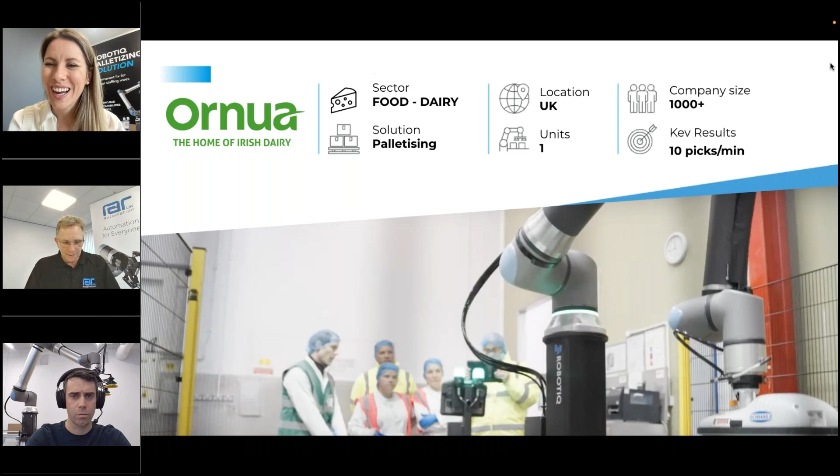Correct, yes. So without any further wait, let's dive in and we'll present you the project in action. I'm just going to do a little switch to make sure you have a great video presented. So guys, over to you.

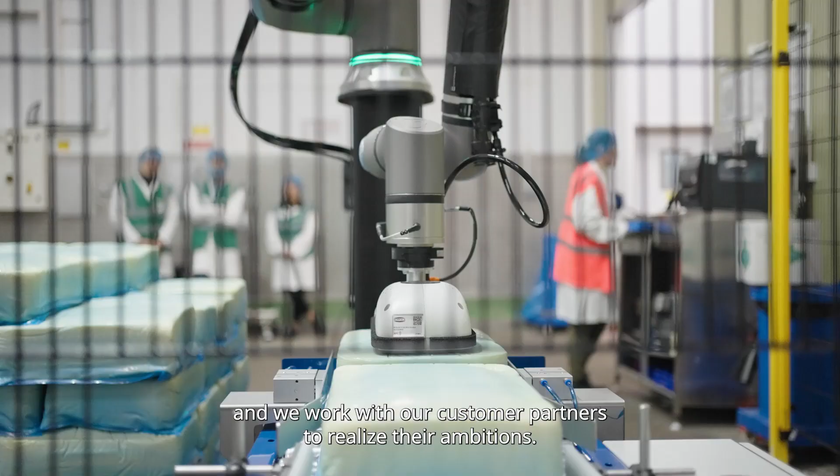Ornua is a dairy cooperative which specialises in the marketing and sales of dairy products. Our culture is founded on innovation and collaboration, and we work with our customer partners to realise their ambitions. We decided to look at automation because we recognise the potential of new technologies in increasing efficiency and also helping us develop talent and deploy human resources in the most effective areas on site.

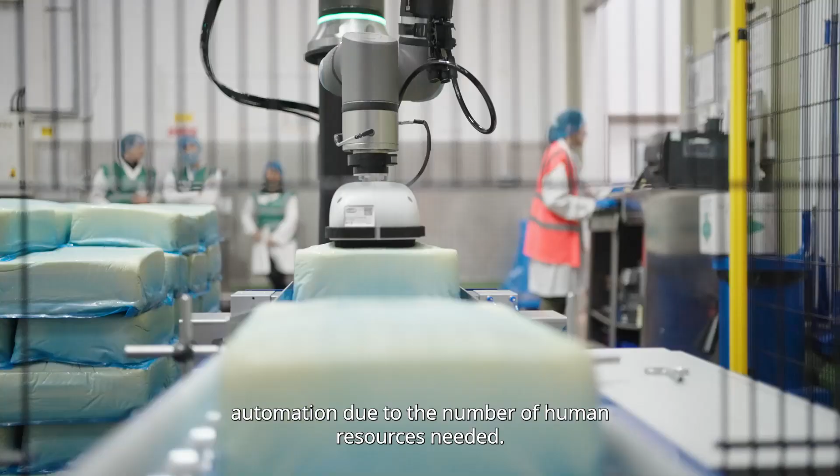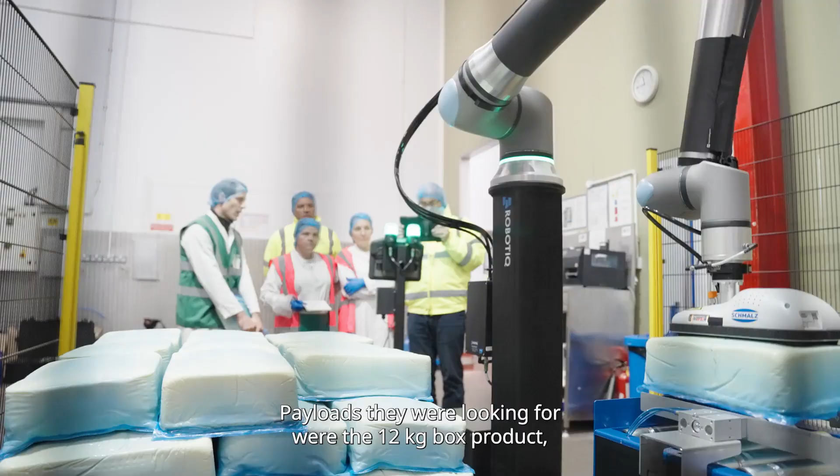We looked at palletizing as the first area to explore automation due to the number of human resources needed. If we can automate that task, then those resources can be used elsewhere. There's a health and safety aspect as well. Ornua were looking for end-of-line palletizing to free up some labour. The payloads they were looking for were the 12-kilogram box product, a 6-kilogram box product, and then the cheese, which is a 10-kilogram product.

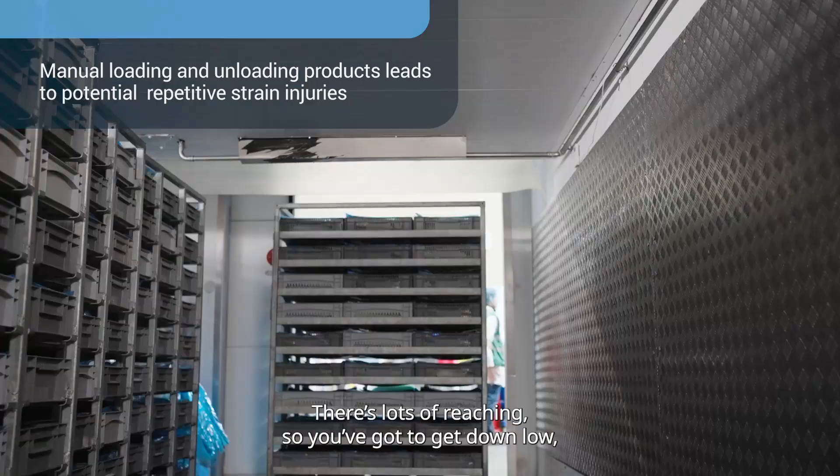Manually loading and unloading product leads to potential repetitive strain injuries. There's lots of reaching, so you've got to get down low, you've got to get up high to palletize manually. It's an application where it's quite tough to hire people because it's a repetitive task, low skill. The turnover for the employee is quite high, and it can be a real challenge.

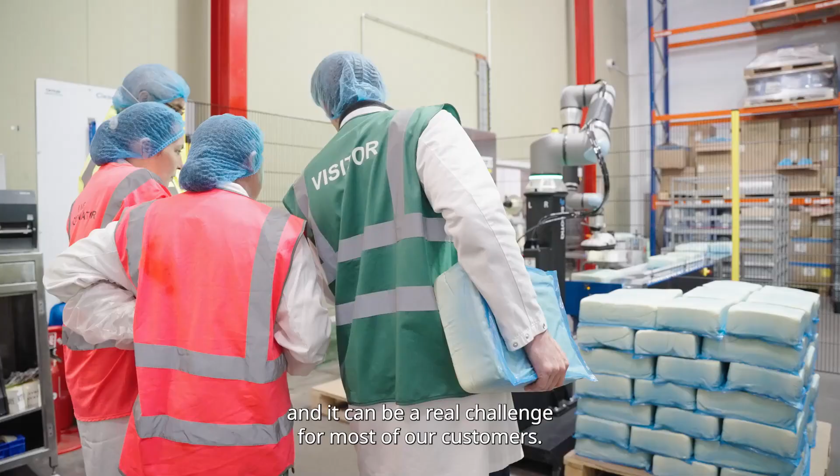For most of our customers, they will automate the palletizing, and the people that they free up will be assigned to a higher value task.

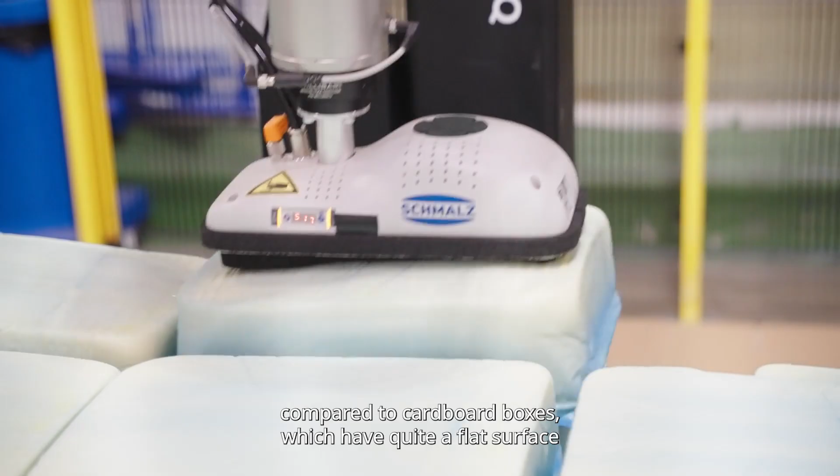The challenges with palletizing the dairy products in the film are the film could become quite slippery, and compared to doing cardboard boxes, which is quite a flat surface and uniformed, the dairy products can come in different shapes and forms. When we were looking to find a solution, we searched for a few suppliers, but they didn't offer the collaborative robot. It was more of a robotic palletizing cell, which means the human interaction would have been completely guarded off.

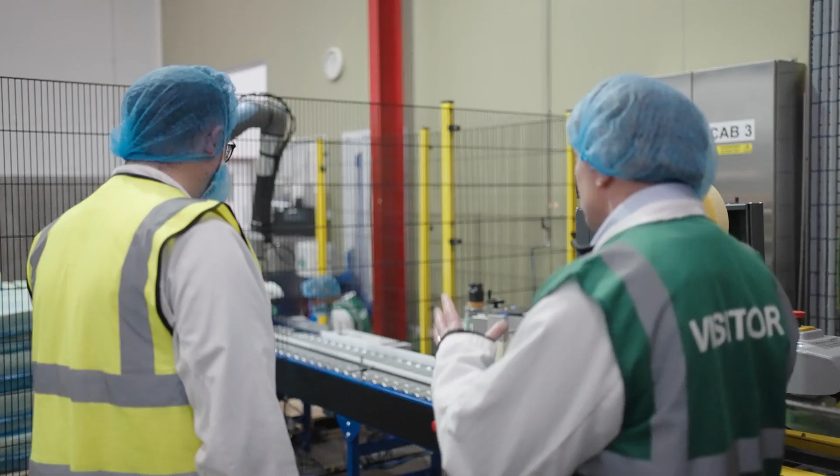It's important to have the option of people to be able to work around the Cobot due to the nature of the product. We pull out on pallets quite regularly.

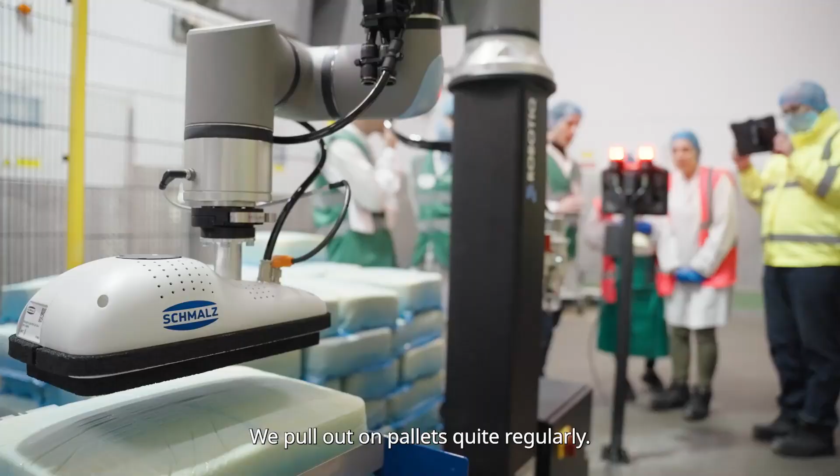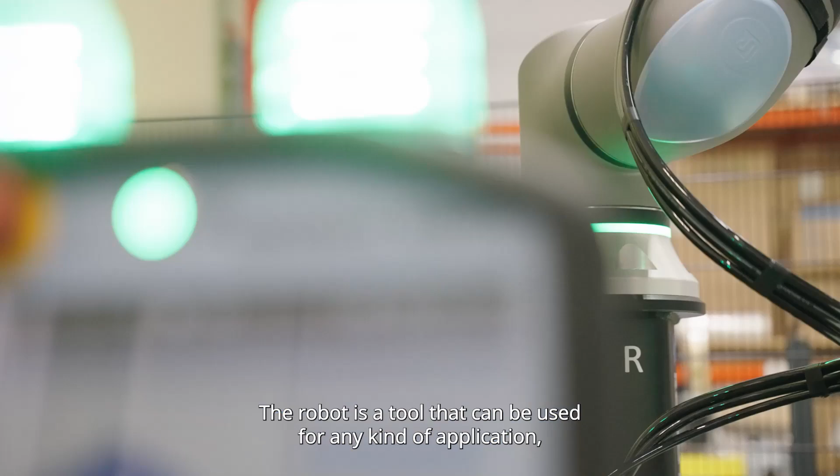We got in contact with RAI UK and Robotiq, which helped us find a solution. What we do is basically we build a solution all based on the universal robot. The robot is a tool that can be used for any kind of application, but we develop a software level that's dedicated for palletizing.

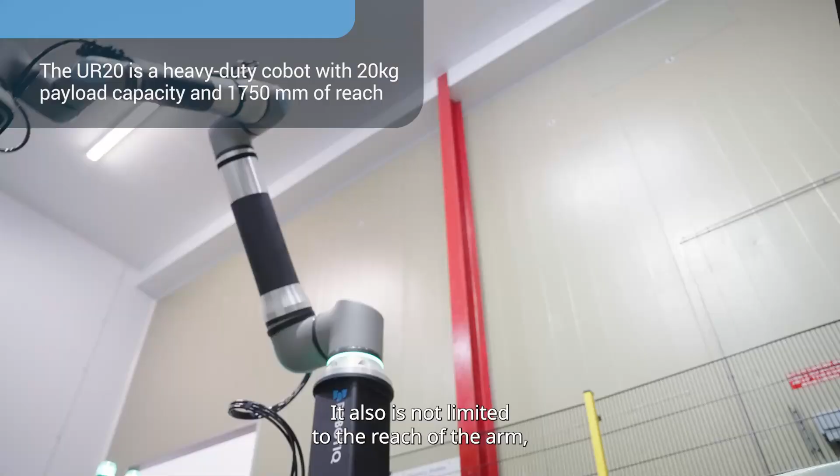When I found out about the UR20, we were quite excited due to its capability of lifting up to 20 kg. It also is not limited to the reach of the arm, which means it can stack higher and further away.

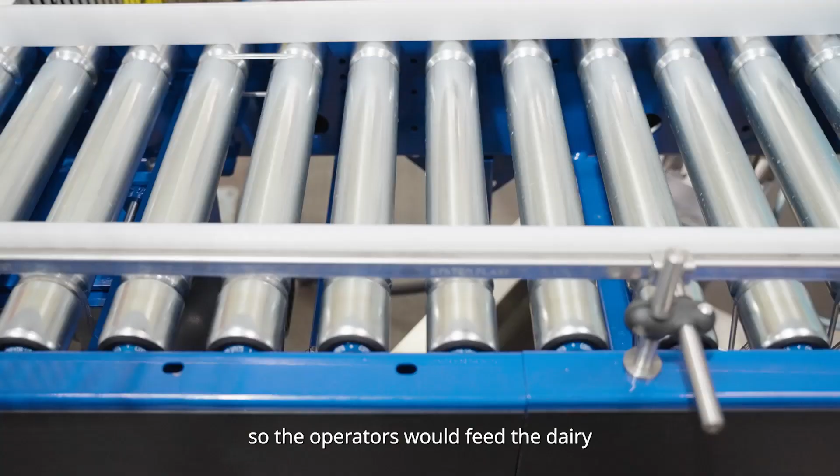The task that the Cobot is performing is a simple pick and place. So the operators would feed the dairy products or the boxed dairy products into the conveyor. The Cobot will then pick up and put onto a pallet in a correct format.

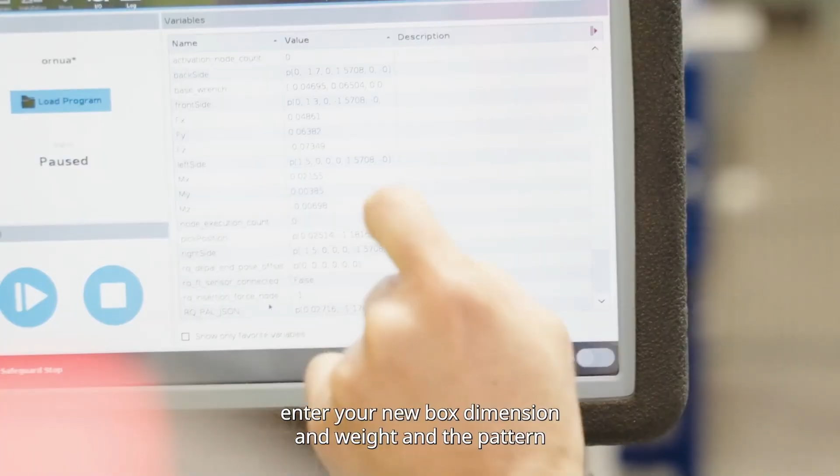Having a solution like we have, it means a visual setup, so you don't need to program lines of codes. You will just open the palletizing interface, enter your new box dimension and weight and the pattern, and then you just press start and the robot will do everything automatically.

The process of working with Universal Robots, RAI UK and Robotiq has been quite smooth. We've had regular updates throughout the process. They've done a lot of trialing and fed back at every point.

The feedback of customers using Universal Robots is that they're user-friendly. We have many customers who are repeat customers. They buy multiples. Very satisfying to see the system now deployed and up and running.

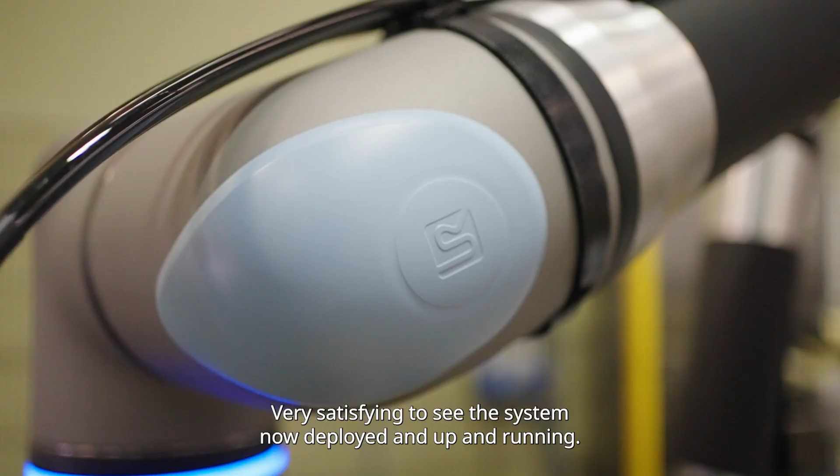I'm hoping after the install of this Cobot that the business will be a lot more open to adding more automation on the ingredients and food sites. Repetitive and dull tasks just need to be automated. That need won't go away, it will keep on increasing. So for the future of automation is bright.

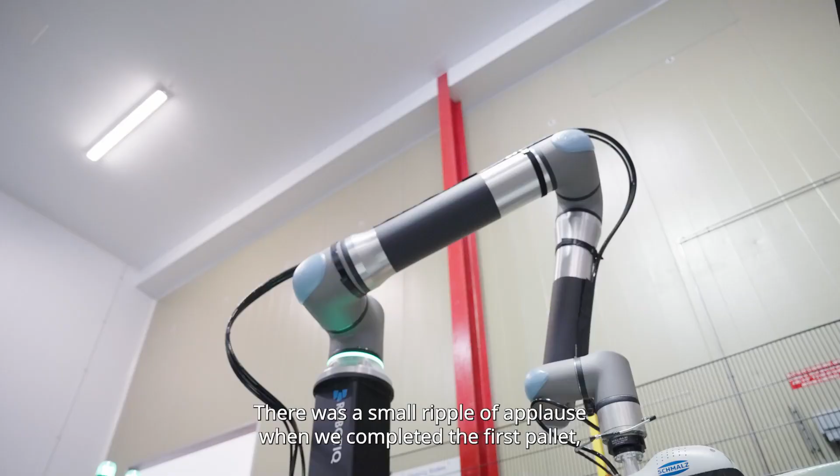It's very exciting to see the UR20 running. The response here has been excellent. There was a small ripple of applause when we completed the first pallet, so which was nice.

Thanks for this amazing video. Oh, I won't start it again. I should make sure that I'm unmuted. Okay, I'm unmuted. Everybody's unmuted. Okay, great. Great. Thanks for this great video. Looking good, guys, with this little blue caps both on the floor and in the video.

You must be really proud of that project too, also with a great collaboration with Ornua. Yes, it's been good to work with them, and yeah, and also our partners. We work with a conveyor company, Denny Brothers, who helped us with the in-feed side.

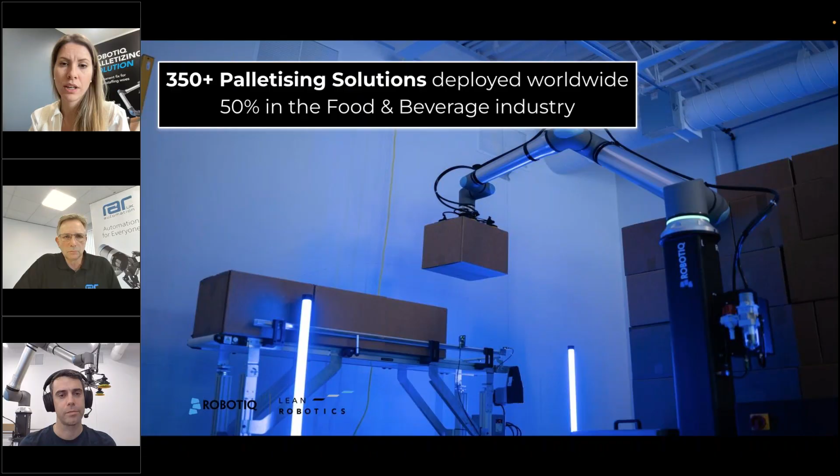Great. So yeah, we were seeing here already more than 350 plus solutions deployed worldwide. Pretty impressive numbers, considering that the solution hasn't been out in the market for so long.

Yes, the majority of ours have been in the food industry mainly, and that's not just human food, it's pet food as well. We also have an application in consumer goods, so one of the companies listed there. So they're the main ones - we followed your lead really. We've looked at the type of companies you're working with and found exactly the same. And also the range - it can be a small company, maybe 50 employees or so, right through to the bigger companies, the multinationals.

Great. I think you also know really well the cosmetics industry, but from cosmetics to the little bakery - I think the great project you deployed recently at a small bakery in the UK, right? Yes, the smallest one is a bakery company, and then there are others who are multinationals.

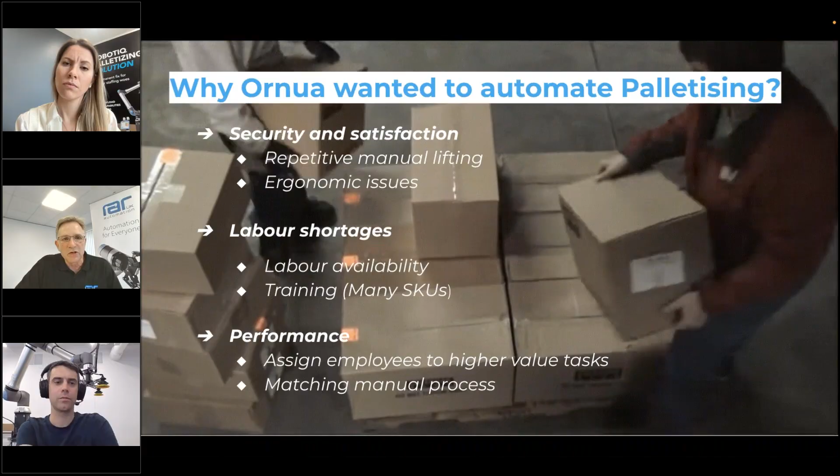Particularly with Ornua, there were challenges in their application because gripping was the problem. I think Jack mentions it in the video - the shape is not always consistent, and there's condensation, so it's a bit of a wet, slippery application. So gripping was the big problem.

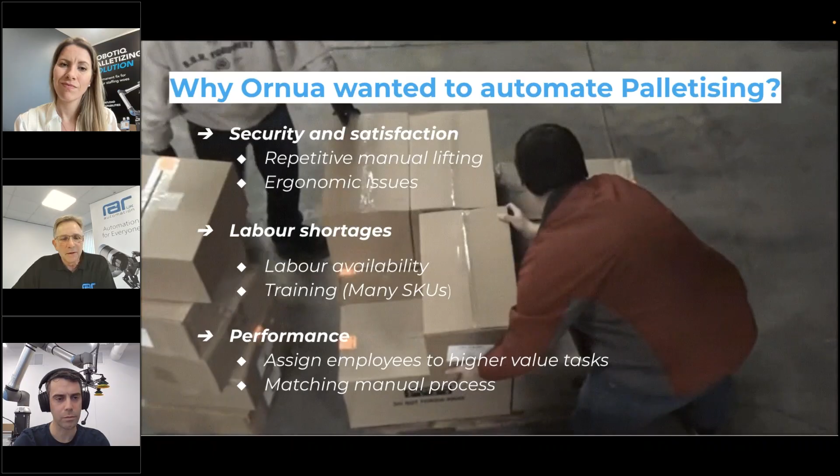Also, we're key to getting the product with palletizing - it's key to get the product in the right place for picking. So that's where the conveying comes in. It's important.

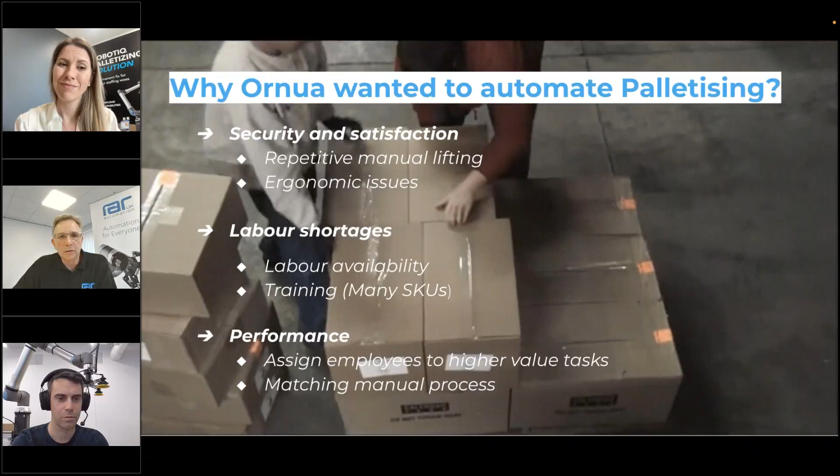Obviously they were keen on ergonomics to avoid manual lifting. And I think Jack also mentioned they were very keen to be able to assign their employees to other roles with higher value tasks, and probably a nicer job really. That's the key.

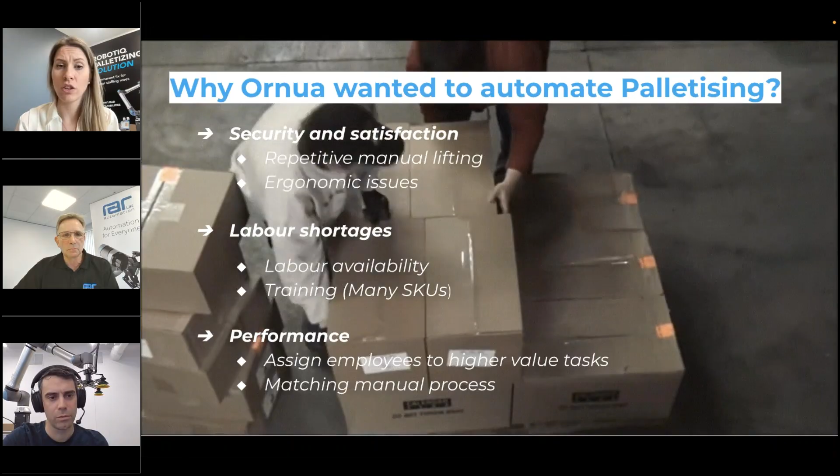So three main elements - we have security, and satisfaction of the employee, although they have a very good retention of employees at Ornua. So they see that people love to work there, but still they would like to offer them a better job and assign them to these higher value tasks, as you said.

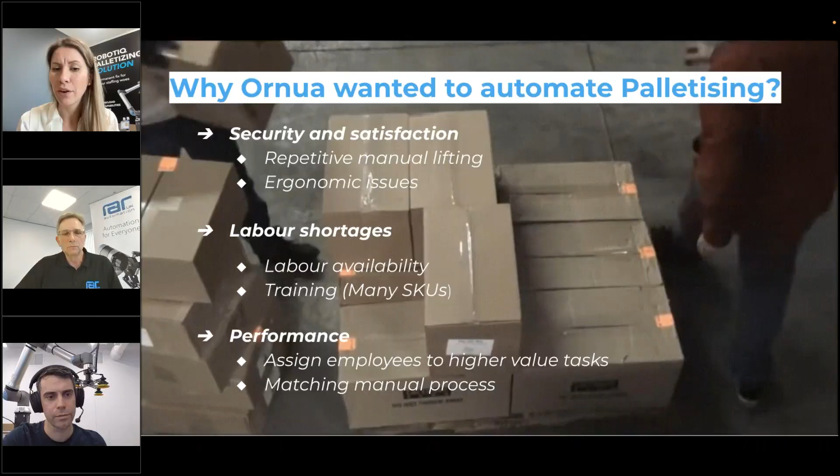And labor shortages - I don't think they're saved from or an exception to the rule of many other manufacturers. That's correct, we do see labour shortages in the UK, but I think Etienne mentioned earlier about the flexibility - the ability to add in extra SKUs relatively quickly is an important factor.

So I think it's interesting what Jack was mentioning here. He said we decided to look at automation because we recognize the potential of new technologies in increasing efficiency, and also helping us develop talent and deploy human resources in the most effective areas on site. So simply confirming what their need was to go through automation.

And we see a lot of people say, okay, we have so many potential elements in our production floor where we could automate. Why do people tend to choose right away the palletizing, you would say? Maybe Etienne, what would you say about that?

There's two aspects, I think. One, it's a job that's a bit tough, so we tackled it. The population is aging, and it can be physically challenging. For example, lifting 12 kg boxes all day long is probably not the job you want if you're 60 years old. Maybe at 25 you can do it, but at some point it's just tough. So that's good reason to automate it.

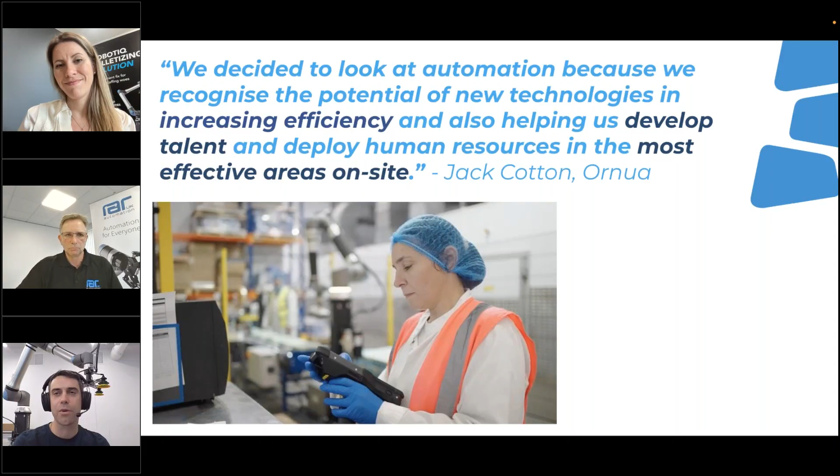It's not standard. If you go downstream to the pallet, there is a standard. The pallet is standard - there's UK size, European size, Australian size, or whatever, but at least there are some standards. A pallet is already defined by the industry, so we always know what the pallet is.

So it's easier to automate for a company like us, Robotiq, building a solution like that is easier than other applications. For the end user, there's always some little things that change that we need to adapt to, but it's always downstream, always in similar environments, always on a pallet - either cardboard or plastic, but it's a semi-rigid thing that you place on a pallet. That's probably the easiest application to automate.

If you go upstream, you need a bit more skill to do the packaging, the wrapping - those applications are tougher to automate. It's really like replicating the manual process. So for people on the line, if you don't know where to start, maybe end-of-line palletizing can be a first step, because a collaborative robot can allow you not to change your equipment but to work with what you currently have.

So we'll bring you through the journey of the lean robotics methodology, as we said. We really focus here on the people, the productivity, and the adaptability, and that's the beauty of this type of solution. We usually go through three phases: design, integrate, and operate.

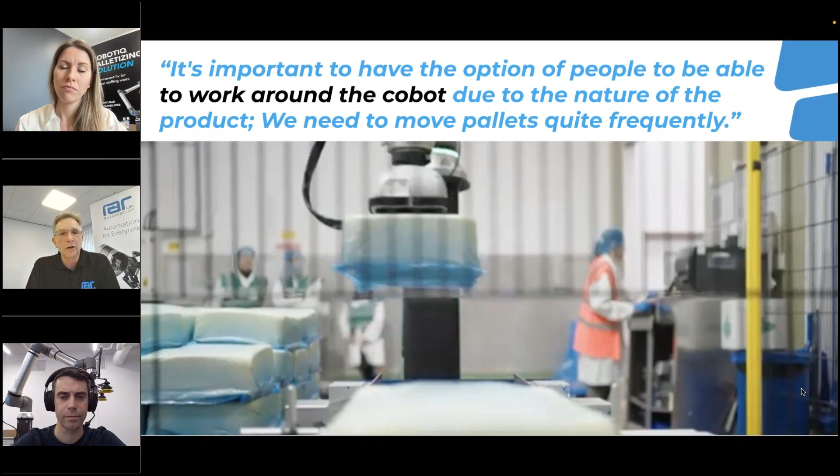Sometimes we hear about scanners. Were there any security scanners in this case, or only the light curtains? On this one, we used light curtain, but other applications we have a scanner. They do the same function. There are reasons for choosing one or the other, sometimes customer led, sometimes we advise as well.

Thanks a lot for that, Andrew. Very interesting photo to see, as we said, the people working around the Cobot. So as we design, we won't go over all that slide, but just to give you an idea of really our way to proceed.

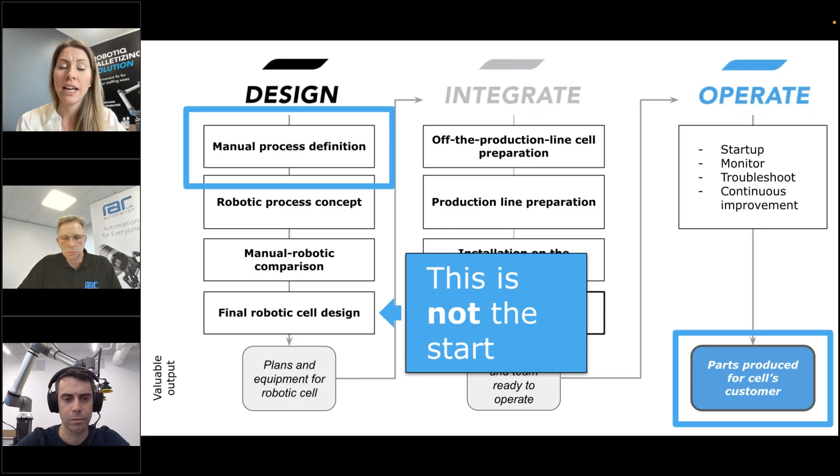Sometimes people really focus on the final cell design. So Etienne, maybe give us some thoughts about how do we go from the manual process in this design phase to the automated process? The typical thing we start with, before any orders come in, is what I call the concept phase. At the concept stage, we'll be looking at what we need to automate, the manual process, and the KPI of the customer. Usually they will give us a cycle time, so we need to achieve 8 boxes per minute, something like this.

Sometimes it's also about the accuracy that they want to reach on the pallet, how tight they want it to be. So these kind of things we need to look at, and then we come up with the concept phase.

The concept phase looks at the high level idea, so are we going for a collaborative application or not? The solution we have is sometimes confusing for our customers, so it's important to mention it: it's both an industrial robot and a collaborative robot. Same hardware, we can apply parameters to get it into collaborative mode, so it will move a bit slower and be gentler. We can reach maybe 5-6 picks a minute with that.

But the same hardware, without any extra cost, we can just put it to maximum speed and acceleration, and then we'd reach 12-13 picks per minute, behaving like an industrial robot. So that's the kind of thing we want to tackle at the concept phase, because it will change what we need to deliver to the customer.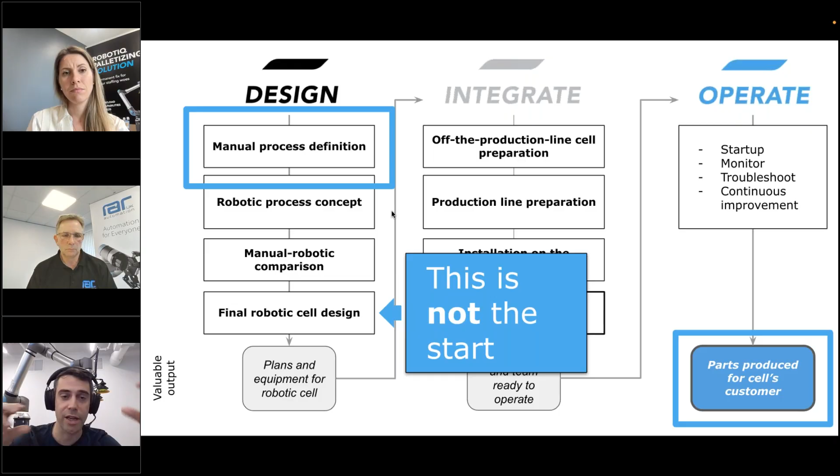The nice thing with our standard solution is that the design phase is really short. If you went to an integrator starting from a white page, basically, the design could last a couple of months. In our case, there's a solution we can deploy in pretty much all scenarios we've seen, so the design phase is usually really fast because for us it's just modules. You want this and that, we put it together and the solution is there. We're not building from scratch.

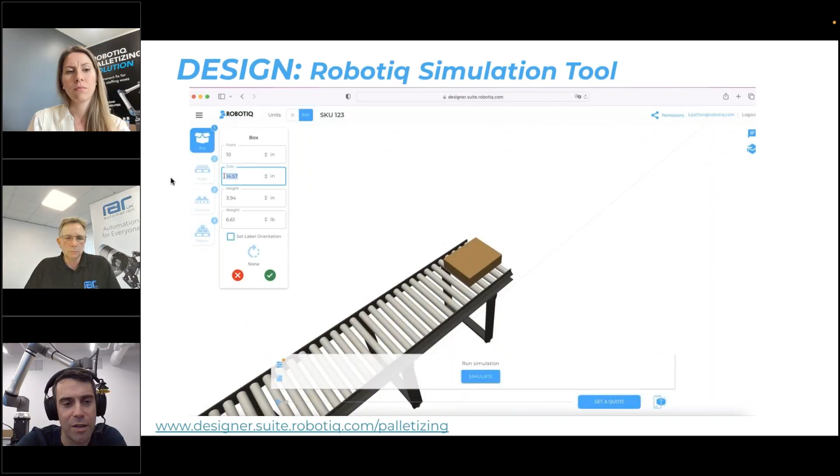Now just showing the simulation tool, which is also a very nice tool we use in the design phase. It's accessible, public, on our website, where you can configure your application. You input the box you would have, the conveyor you would have, the pattern you desire, and then you get simulation results in a couple of minutes.

It's also nice to try this because it's actually very similar to the interface you have on the teach pendant, the HMI. So what we see right now with the pattern is exactly what you would get on the robot, and it's how you would teach the robot your palletizing pattern. With that, you can see if it's suitable for you, both in terms of footprint and performance. That's everything we do at the design phase—it's swift and easy, so it's definitely an important part of a project.

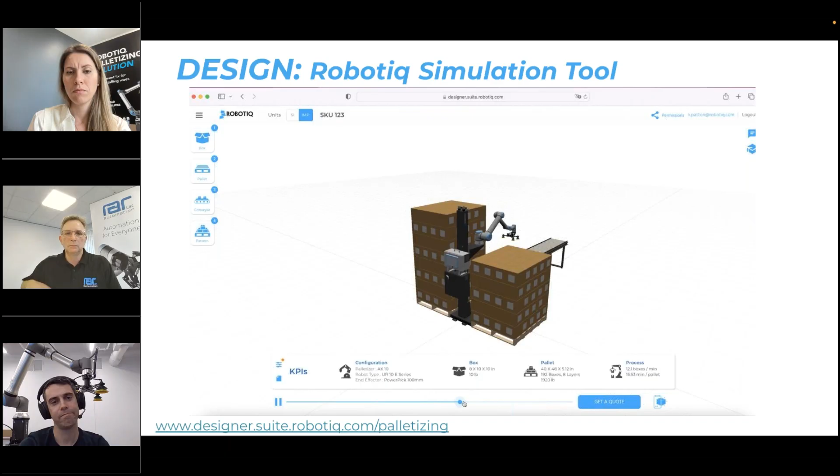Good, thanks a lot, Etienne. I appreciate it. You mentioned it's pretty fast to deploy the solution, so we talk a lot about standardizing with easy scalability. What do we mean here, especially? Or maybe Andrew would add something.

I could start, but first of all, I think with Ornua it's a good example that it's the first Cobot project throughout the whole corporation. So it's first at that factory, but also through all of their factories. They are learning with the project that they can now standardize on it, and they can deploy to other factories, within the same factory for palletizing that we have today, but also for other applications.

It's really cool to start with this technology because there's a learning curve. Whatever technology you adopt, there's always a learning curve. They will have this learning curve—it's an easy one, at least with this—but then they can replicate it to many other sites or many other applications. So they can grow in both directions. While with a...

...custom made solution, sometimes it's not available at other sites. Ornua has their factory in England that we work with, but for example they have one in Wisconsin, one in Spain—they have many elsewhere, I lost track a bit. So having a standard solution means it will be available everywhere, at the different sites they have.

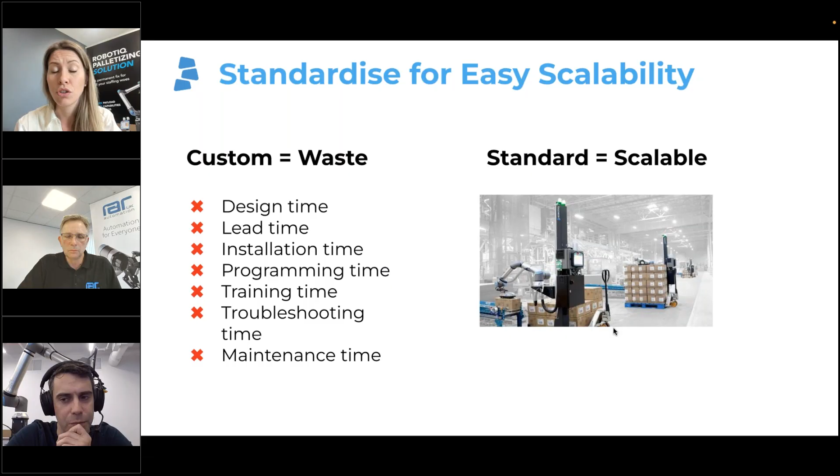This is an example with Cascade Coffee, a coffee manufacturer on the west coast of California. I think they are at their 6th automated line, and we have another great customer you can find in a case study online, Tidy Products. They just keep ordering more and more palletizing lines. Within 1 year, they've ordered their 8th palletizing solution, which they can deploy easily by themselves since they're able to scale the solution by repeating the standard solution they have.

So what about the customer, or what has been chosen here? We'll go over the solution. You have these three elements that people can choose between: height or payload, whatever fits best for Ornua.

When we first started talking, I think it was December 22, nearly a year ago. We were originally looking at the UR10, but we knew the payload was 12 kilograms, so we were beyond the limits of the UR10. With all applications, we look at height. We've got a range here: the PE series, which is a fixed pedestal unit, gives us heights up to, depending on box size, typically 1.5 to 1.6 meters with a UR10. If we then have the 7th axis version, the AX version, this gives us a height capacity of 2.75 meters. With Ornua, since we needed both higher payload and the reach of a higher solution...

The UR20 PE20 solution came, and it was a good fit. In fact, it was the only fit we offered. That's partly why there was a delay from the first contact through to the ultimate deployment, because the UR20 was not really available until this summer.

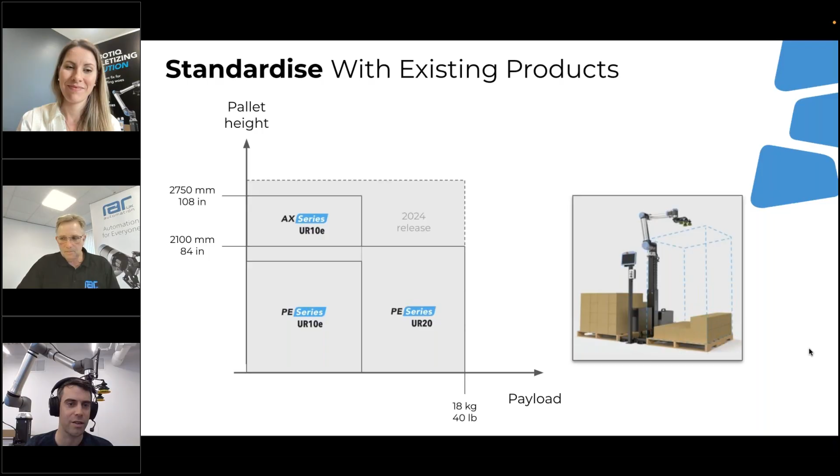I don't want to spend too much time here, but I see in light gray a 2024 release. What can we expect in the coming months? That graph is pretty obvious for anyone who understood it. We'll be working on a solution to provide higher pallets with higher payload. That will be coming next year. We're always looking at expanding the application coverage we have with our projects.

We were talking about the solution that was selected. Can you present real quick what are the three members of our palletizing products? Sure. On the left, you have the first one we launched, the AX10, the AX series with the UR10. This one was really meant to be a flexible tool that could do anything at that time, because back then there was only the UR10 on the market. It's basically the UR10 mounted on a 7-axis going up and down, which is why we can reach those high pallets.

After that, we developed the P series, with the P standing for pedestal, an adjustable pedestal. So we keep some of the flexibility, and the pedestal can be adjusted depending on the pallet height you want. But then we simplified a lot of the components, and simplifying components means lower cost, which is nice for our customers if they don't need high pallets—probably a good fit.

Then we have the latest one, the PE series with the UR20, which we'd call the P20. It's also with a pedestal, not a 7-axis. With the high reach that Andrew mentioned on the UR20, we can do much higher pallets if you compare the P10 and the P20. And of course, there's the payload that comes with it.

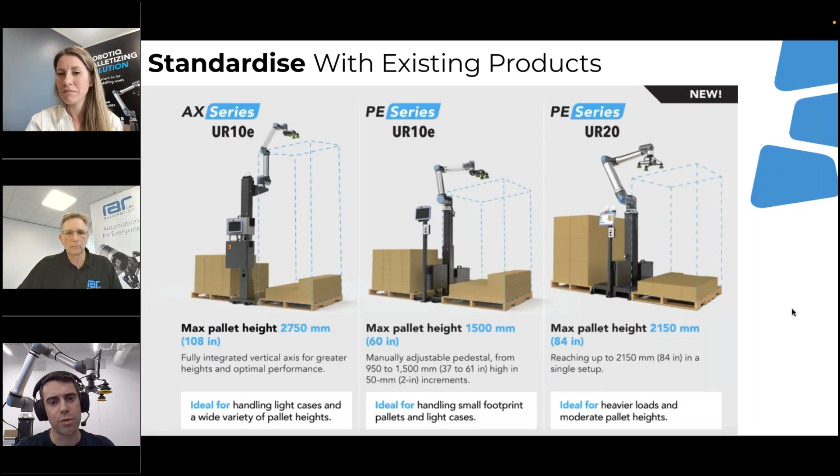Coming back to Andrew, what you selected for Ornua was this P20. Can you tell us a bit more about the main benefits of the new P20 solution?

With the UR10, P10, or AX, you can have a bit of limitation on reach. With the introduction of the UR20, that takes away that limitation. Sometimes we need to pick layer cards, for example, or drag sheets in, and if that's the case, you've got to be able to get to them—it's got to be within the range of the robot. So it's that much easier with a 20, and also the payload—many customers wanted more, saying they wanted 12 kilograms or more, and the UR20 opens up that opportunity. Those are the key factors, really.

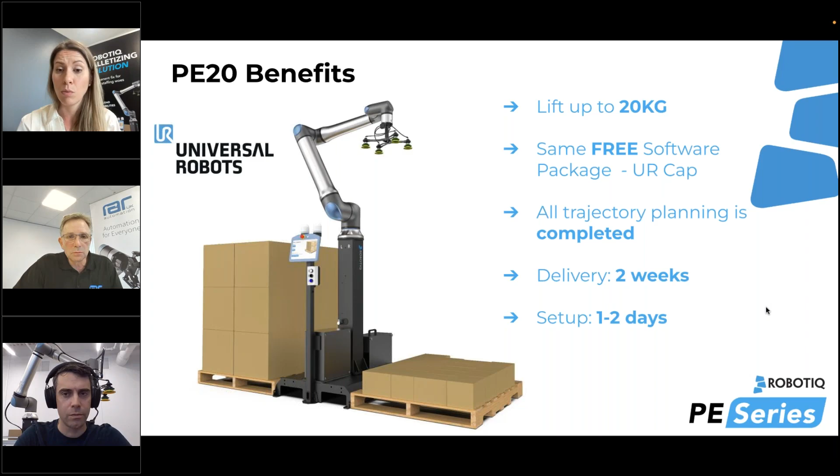Great, some slight elements to mention. You've discussed a project that can be deployed sometimes in weeks. We'll talk about it a little later, but the setup can be done really quickly.

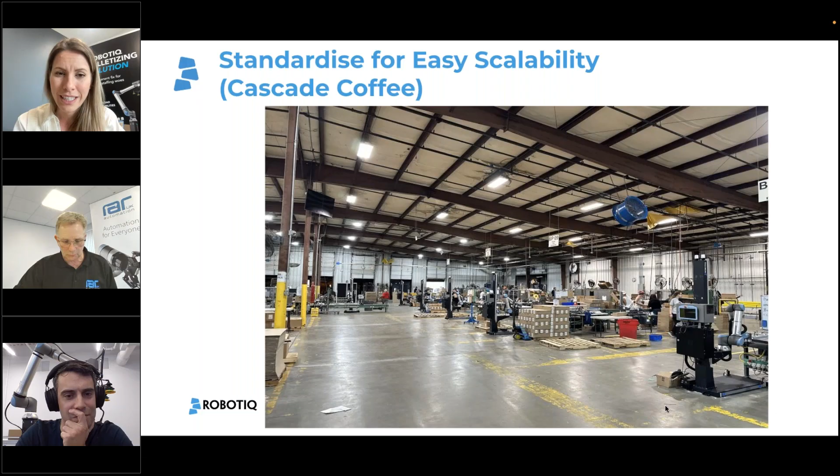Just a quick picture of what we can see. You've seen it in the video, but this was the PE20 that was developed there. I also wanted to share some more pictures about the Cascade Coffee project in the US. Very interesting to see the scalability we can reach with this palletizing solution, with the various lines.

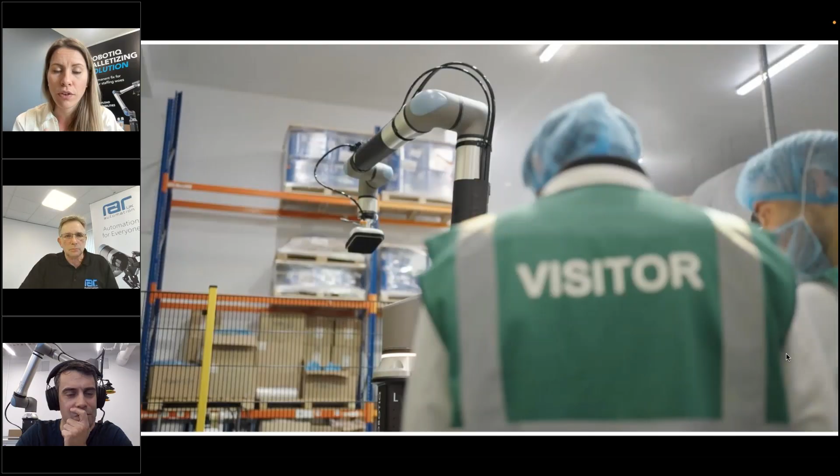We'd also like to go deeper into the project. What would you say were the main challenges in terms of the solution? So Andrew, in the video, Jack mentions the challenges with film compared to cardboard boxes, this flat surface issue in the dairy industry. I don't know if we have other people in the dairy industry on the line, but there are different shapes and forms presented to the palletizer, and here they also needed some human interaction. We've prepared this slide to present the main challenges. Andrew, could you give us some more details?

Okay, well the cardboard boxes are pretty standard, so we don't have a problem with shape there, or generally environmental issues, because they're generally hopefully dry. I suppose you do get problems if the product's not sealed properly, so you pick a box and it opens. That's quite key.

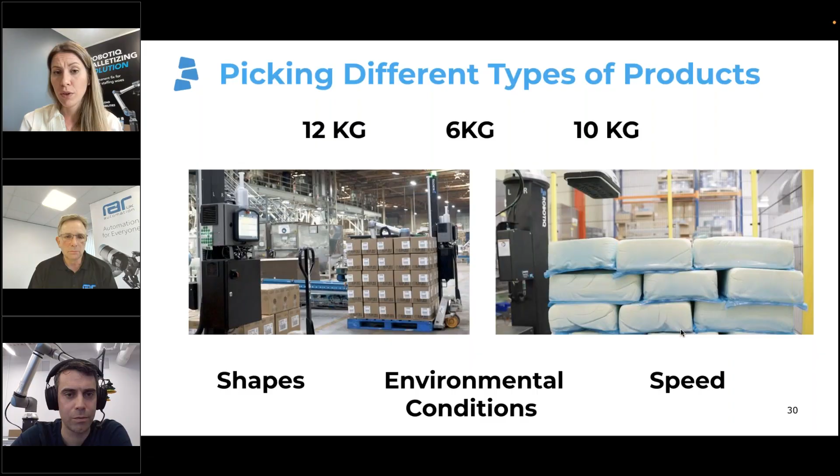So we know we have different environmental conditions, sometimes different shapes. Very interesting to hear about that. Thanks, Andrew. I see the time again - I want to make sure we fit in the hour and have time for your questions.

Going into the integrate phase, Etienne, can you tell us what a typical installation of the palletizing turnkey solution looks like? I talked earlier about the concept phase, which is basically before the order. Usually a couple of weeks to align on that, and then this timeline starts when we confirm the project and receive an order. At this point we finalize the design internally - we always have some engineering left to do.

In parallel, we prepare for what we call the FAT - most of our customers are familiar with that, the factory acceptance test. That's something we do in our lab, and the idea is to integrate the whole project, assemble everything, and test with the customer's parts. We're confident in our project, but we still believe this is a good idea to mitigate risk.

In the previous slide you were talking about the challenge - it's really common that even for cardboard, which is mostly standard and easy like Andrew said, sometimes the customer doesn't fully master what's upstream, and the size of those cardboard boxes will change. They tell us it's 300 millimeters, but in reality there's always a bit of deviation. So we do FAT to find those irregularities and adapt to them, so that when we go on site everything runs smoothly. Typically after a month we execute the FAT, then we ship everything to our customers.

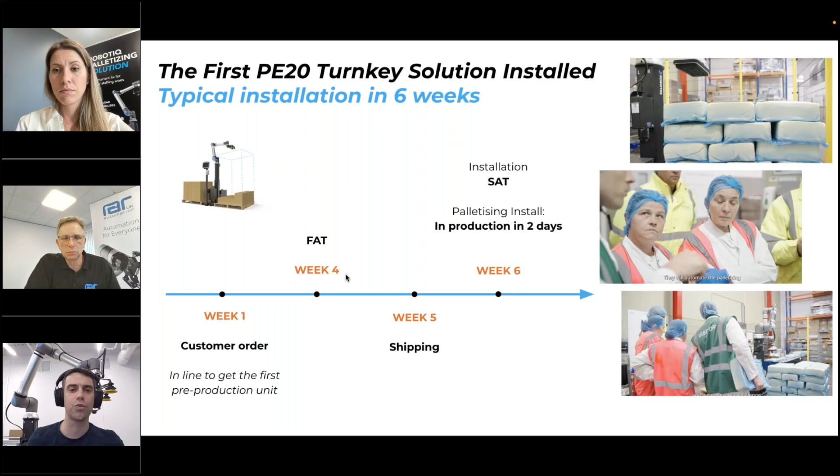We go on site to install. Typical installation is 2 days - a day to set up, a day to fine tune, and then we usually do a day for training, handing off and teaching the end user how to do new SKUs, how to operate safely, and all of that. This swift installation, compared to the industry especially with industrial robots, is really fast. I think that comes from two sides: one, it's a standard project; it's flexible and easy to operate.

The other one is the process that we have with the FAT to mitigate risk. So they come together for that.

When people really care a lot, for example if you want to do this factory acceptance test, you could have to stop the production line for many days. In that case you're ready, so when we decide to stop the production line, we don't have to stop for a longer period. We can just do it impressively in 1 day.

Second day is pre-production and tuning. Then we adapt to the reality of each project. Some of them are very low risk because they have nothing else than a single rigid cardboard of average size. So what we call the FAT in that case would be just maybe an hour of testing, and then we're fine and can go install.

Some of them are more exotic, and then we would spend a week of testing. That's what we did with Ornua. They shipped us those cheese block samples to our office, and we had a lot of learnings, and we had to do some iterations to improve our gripping over that. It was a challenge, but it's a challenge that we did in our office before deploying.

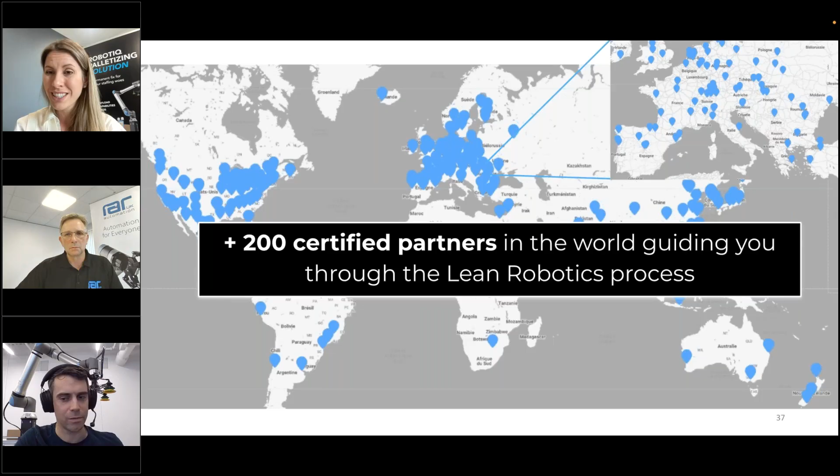This was just a quick example of a video of a customer after the robotic palletizing is deployed. Oh, sorry, here. So sometimes we get asked a lot about how it works with local support. So just a quick slide to mention that we have more than 200 partners worldwide to support you through your lean robotics process. Feel free to reach out to us wherever you're joining us today.